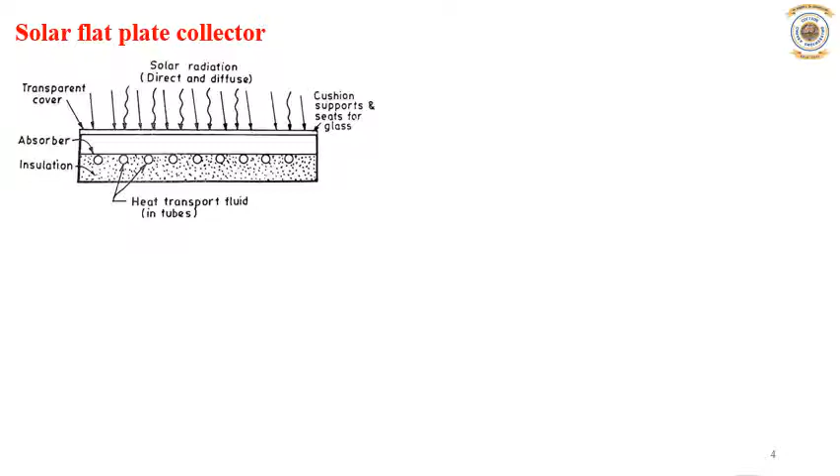So here comes the solar flat plate collector. A typical flat plate collector is a metal box with a glass or plastic cover, called glazing, on top, and a dark colored absorber plate at the bottom. Dark color means black, so a black surface, which is a highly absorbing surface. The sides and bottom of the collector are usually insulated to minimize the heat loss.

So the physical principle of conversion of solar radiation into heat, the fundamental process in general use for heat conversion, is the greenhouse effect. The name comes from its first use in greenhouses, in which it is possible to grow exotic plants in cold climates through a better utilization of the available sunlight.

Most of the energy we receive from the sun comes in the form of light, that is short wave radiation, and not all of it is visible to the human eye. When this radiation strikes a solid or liquid, it is absorbed and transformed into heat energy. The material becomes warm, stores the heat, conducts that heat to surrounding materials, maybe air, water, or other solids or liquids, and re-radiates it to other materials at lower temperature. This re-radiation is a long wave radiation.

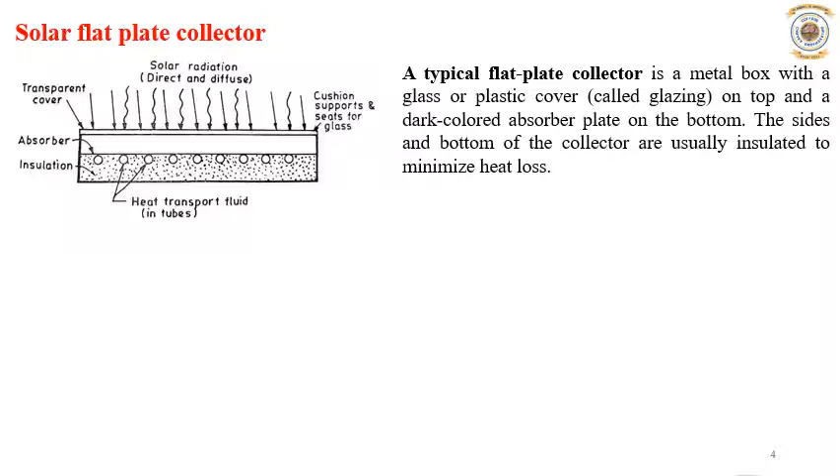So a typical flat plate collector is shown here. Where temperatures below about 90 degrees centigrade are adequate, we can go for the flat plate collector. For space and service water heating, flat plate collectors, which are of the non-concentrating type, are particularly very convenient. You can see here there are tubes.

There are two headers, one called the upper header and the other the lower header, or lower manifold and upper manifold. In the lower manifold cold water is made to flow, and from the upper header hot water will come out. As solar radiation falls on this, the water flowing in the tubes will absorb the heat and its density becomes less, because when it is heated, the density drops. So because of the lighter density, the hot water will flow up in the tubes and collect in a hot water header. Okay.

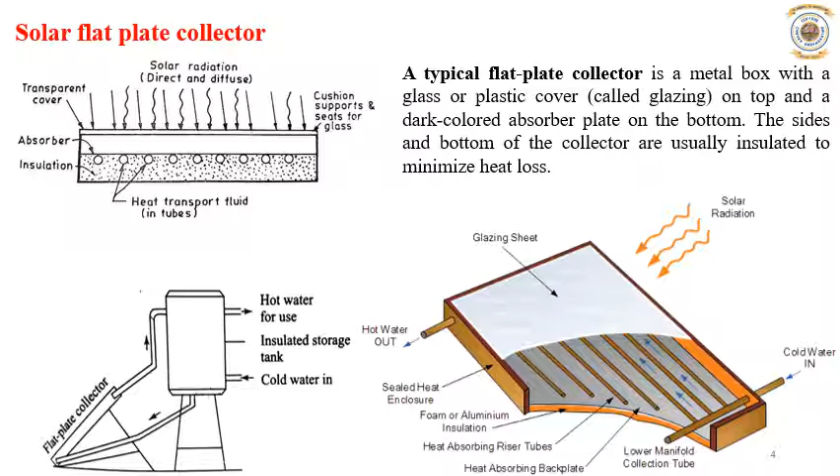These flat plate collectors are made in rectangular panels as shown in the figure, from about 1.7 to 2.9 square meter area, and are relatively simple to construct and erect. The flat plates can collect and absorb both the direct and diffuse solar radiation. Because they absorb both radiations, they are partially effective even on cloudy days when there is no direct radiation.

So flat plate collectors may be divided into two main classifications based on the type of heat transfer fluid: liquid heating collectors and solar air heaters. If water or any other liquid fluid is used, it is called a liquid heating collector, and if air is used, it is called an air heater. The principal difference between the two types is the design of the passage for the heat transfer fluid.

The majority of flat plate collectors have five main components. One is a transparent cover, which may be one or more sheets of glass or radiation transmitting plastic film or sheet. The second important component is tubes, fins, passages or channels, integral with the collector absorber plate or connected to it, which carry the fluid. The third important component is the absorber plate, normally metallic with a black surface, although a wide variety of other materials can also be used.

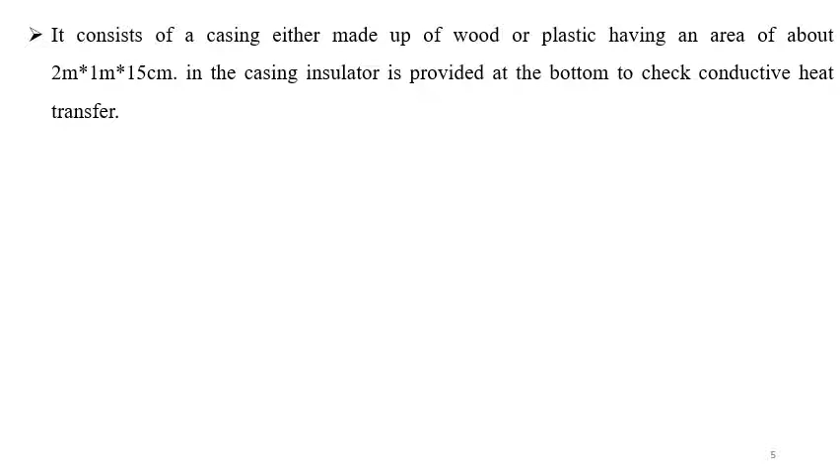It basically consists of a flat surface with a high absorptivity for solar radiation, called the absorbing surface. Typically a metal plate, usually of copper, steel or aluminum, with copper tubing in thermal contact with the plate, are the most commonly used materials. The absorber plate is usually made of a metal sheet 1 to 2 mm in thickness, while the tubes, which are also metal, are in the range of 1 to 1.5 centimeter diameter. They are soldered, brazed, or clamped to the bottom, in some cases to the top, of the absorber plate, with the pitch ranging from 5 to 15 centimeter.

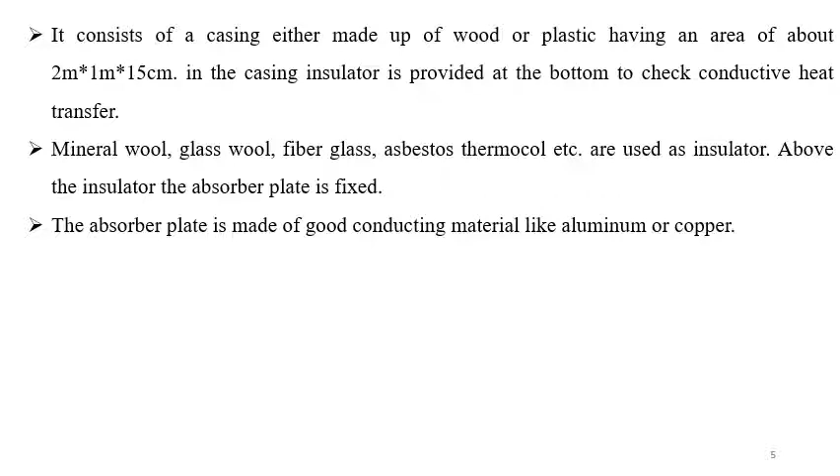In some designs, the tubes are in line and integral with the absorber plate, and for the absorber plate corrugated galvanized sheet material is widely used. The most important thing is that the absorber plate is made of a good conducting material, and it is coated black for intense absorption. Usually the black coating is done by chemical treatment. Selective coatings which allow maximum absorption of radiation and minimum emission are applied on the absorber plate. The underside of the plate consists of absorber tubes which run along the length of the plate.

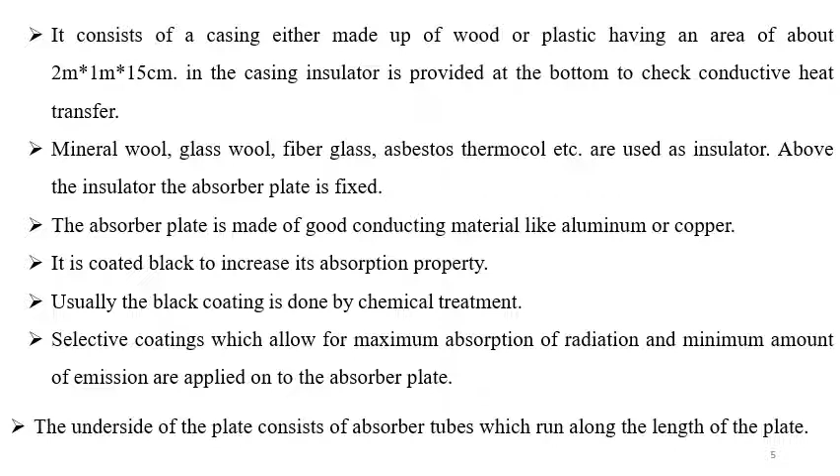These tubes are made of the same material as the absorber plate. Sometimes the plate itself is bent in the form of tubes. Through these tubes, the heat absorbing media or fluid is circulated. This media absorbs heat from the plates and tubes, and its temperature increases. The increase in temperature leads to lower density, so because of the lighter density, the hot fluid will move up. This way, solar energy is collected as heat energy.

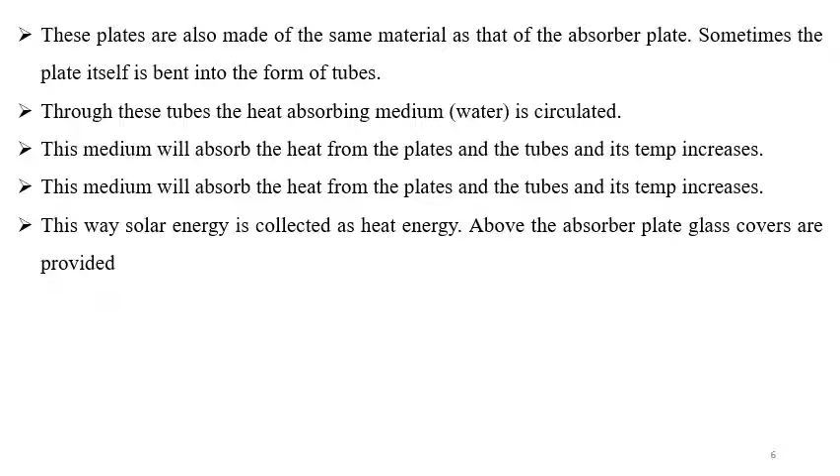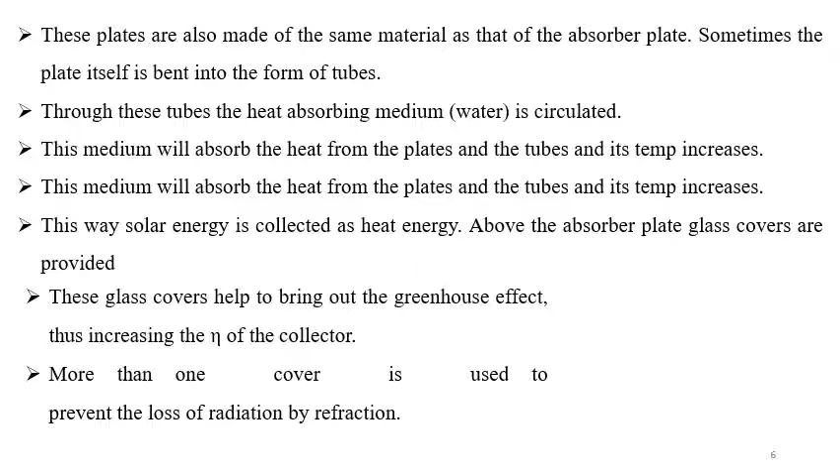Then we will see the parameters which affect the performance of a flat plate collector. One is selective coating, second is number of covers, third is spacing between the covers, fourth is tilt of the collector, fifth is incident radiation, sixth is inlet fluid temperature, and seventh is dust collection on the cover plate.

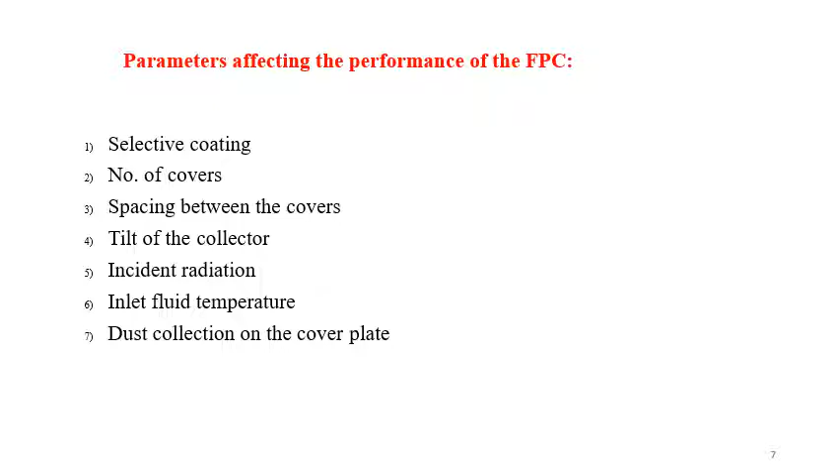The very first factor is selective coating, which will influence the performance of a flat plate collector. The efficiency of the collector can be maximized by coating the absorber plate with materials which will absorb the maximum amount of radiation, and we should take care that it radiates minimum, so it will emit a minimum amount of radiation. Such a coating is known as selective coating.

By adopting a proper selective coating for the absorber plate, the input of the collector can be maximized and the losses minimized, so the performance as well as efficiency of the collector can be improved. So the selective coating should have maximum absorptivity for a wavelength of less than 4 micrometer, because the incident radiation will be having a wavelength less than 4 micrometer.

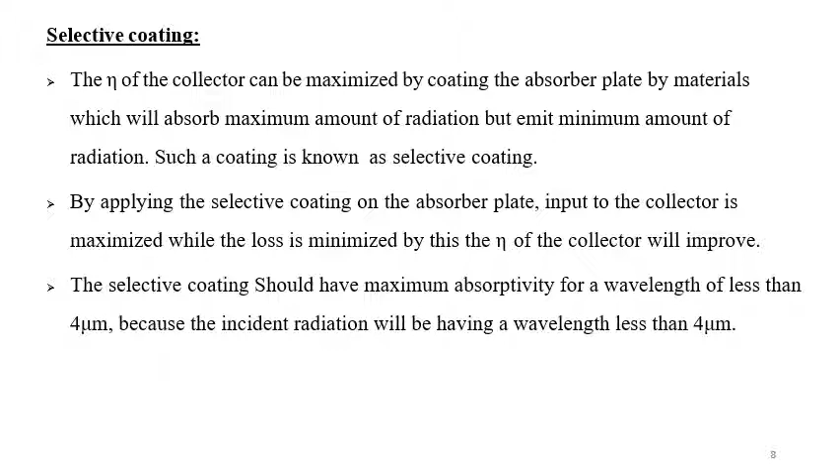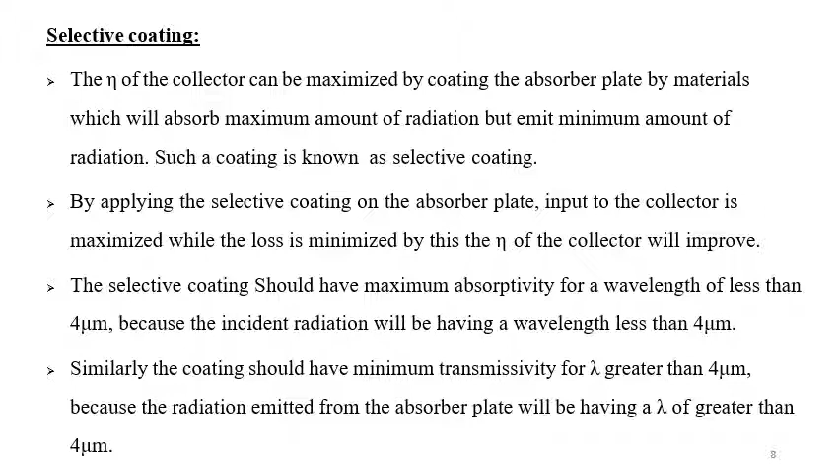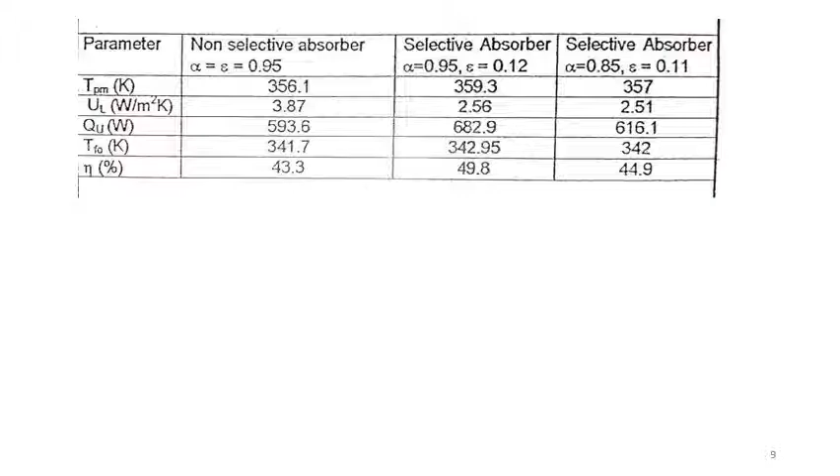Then similarly the coating should have minimum transmissivity for lambda greater than 4, because the radiation emitted from the absorber plate will be having greater lambda. Research shows that the absorptivity will greatly affect the performance, and the desirable properties of selective coatings are: it should withstand continuous exposure to high temperature without losing the absorbing and emitting characteristics, it should be less expensive, and the coating should not be corroded or eroded by the atmosphere.

Now from the above table you can see, for the absorber property, if alpha and emissivity are 0.95, then efficiency is 43.3, whereas efficiency is increased when the selective absorber has alpha 0.95 and emissivity 0.12, to 49.8, and if you reduce emissivity further then it is decreased. So maximum absorptivity as well as minimum emissivity is 0.95 to 0.12. This table is from one research paper, so thank you for their contributions.

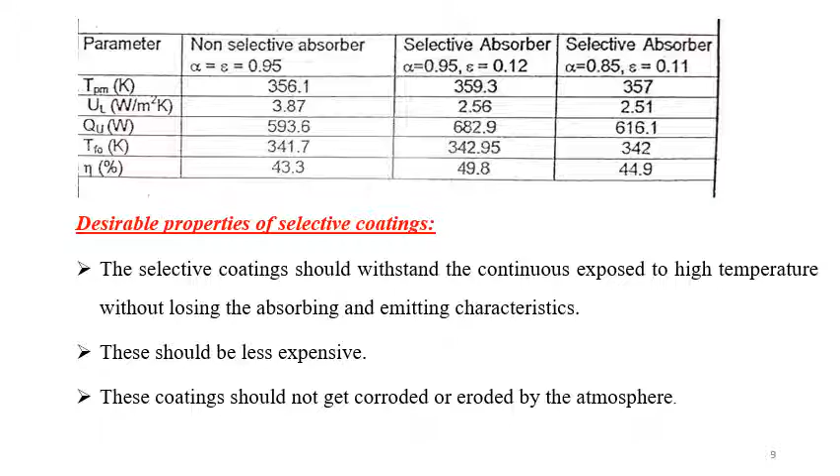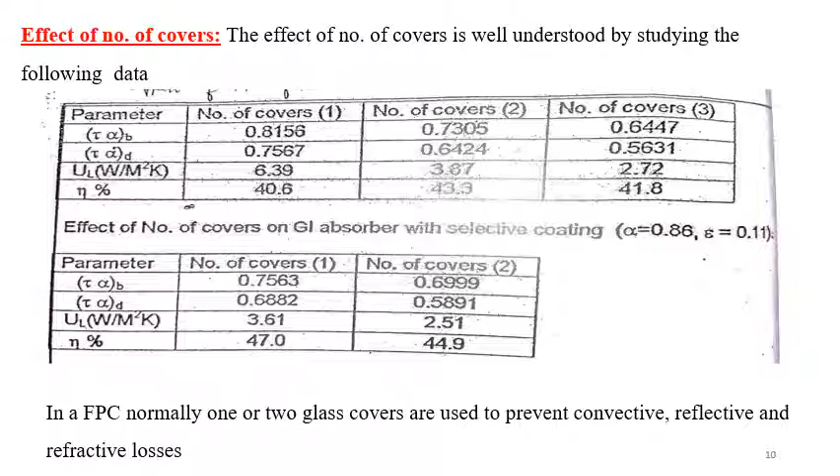Number of covers is well understood by studying the following data. There is one table in which three different cases are considered: number of covers 1, 2, and 3. When the number of covers is 1, the efficiency is 40.6, whereas 2 covers give 43.3, and if it is increased to 3 then it is again reduced to 41.8. So the optimum number of covers is 2. In a flat plate collector, normally one or two glass covers are used to prevent convective, reflective, and refractive losses.

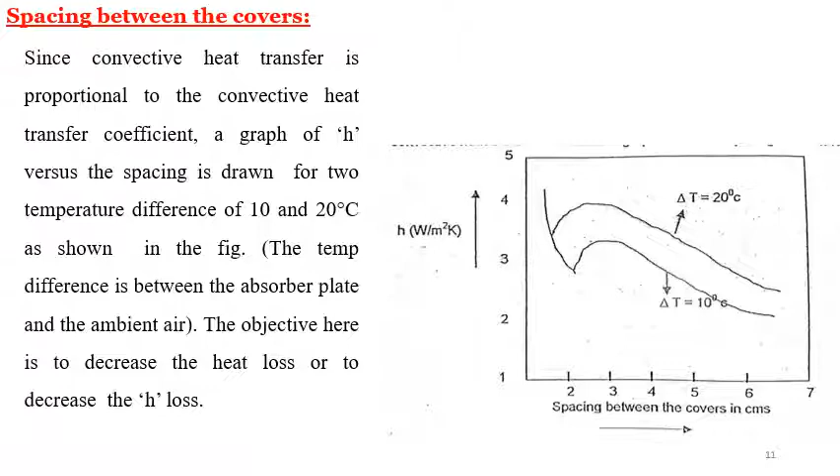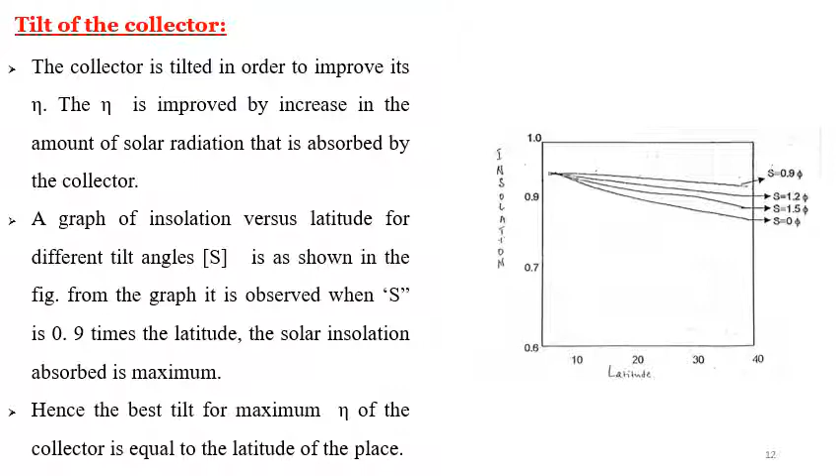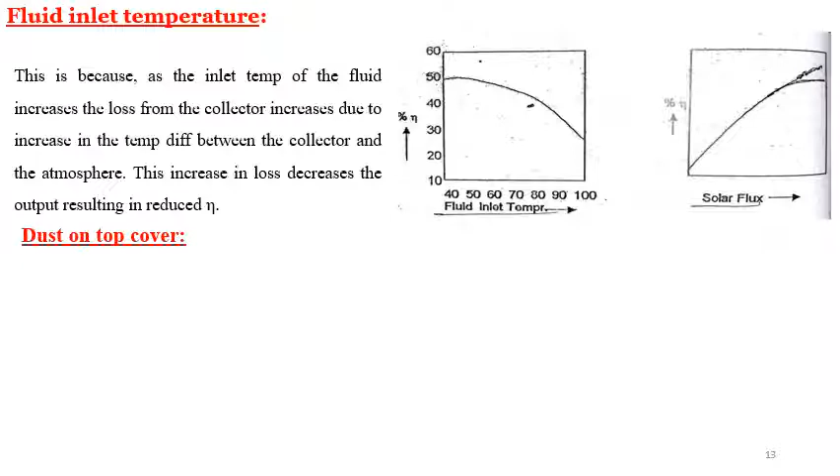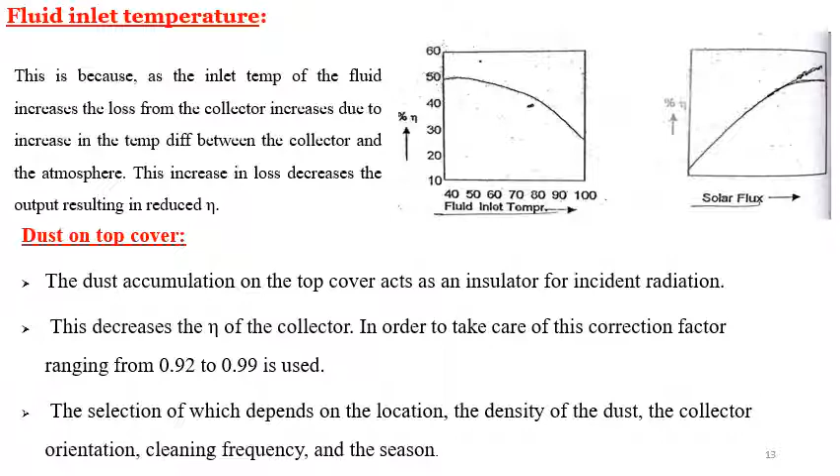Then dust on top of the cover. Dust accumulation on top of the cover will act as an insulator for incident radiation, so efficiency is decreased. In order to take care of this, a correction factor ranging from 0.92 to 0.99 is used. The selection depends on location and density of dust, the collector orientation, cleaning frequency, and the season, which also affect the performance of the solar flat plate collector.